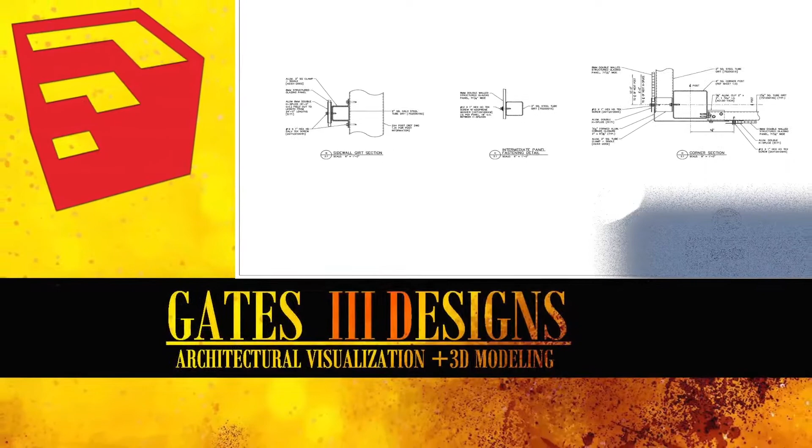Right after high school, I went straight into community college and studied architecture. In community college, almost immediately you're going to learn detail drawing, because at a community college they're preparing you to be a drafter. You have the option, obviously, to go on to a university - that's what I did after working, though. Which brings me to the point of having experience, hands-on experience specifically, is very important, even before learning detailed drawing.

What I mean is, if you can intern for a construction company or even volunteer at like Habitat for Humanity, that would be tremendous. Because first of all, you're using your hands and putting things together, and working off of blueprints. So you get to see how it's done, and you actually get to build it. If your school provides any kind of extended learning, design build programs where you stay off campus and live in a neighborhood, and maybe help do things for nonprofit organizations or remodeling homes or things like that.

Those are great, because I was actually part of a program like that when I went to a university. What we did was work for a nonprofit organization doing signage, and my team was responsible for designing signage outside of the building. It was fun drawing it, and you work with your professor or instructor - they guide you and help you, and you're actually building and ordering, being responsible for ordering the product, sizing the product, and drawing it correctly so it can be cut correctly. It helps out tremendously, so doing those types of things helps a lot.

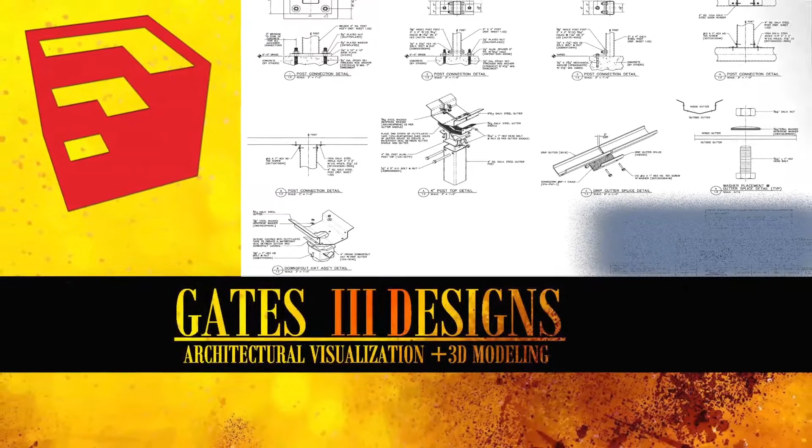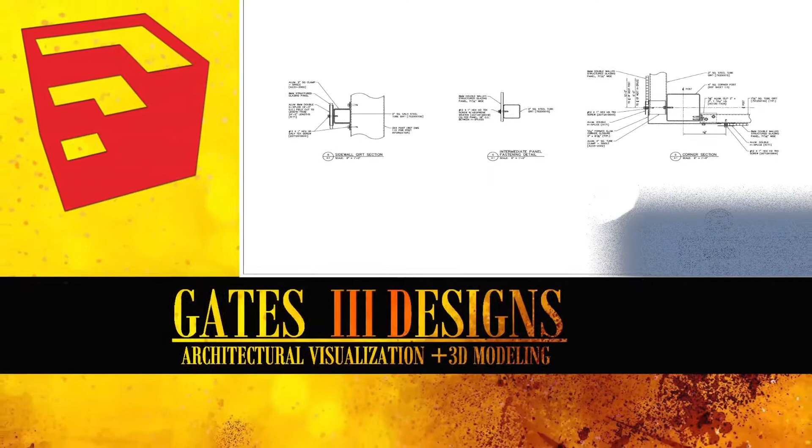I noticed when I went to a university that a lot of students didn't begin to learn detailed drawing until they got into their third year. Some schools second year, but a lot of schools third year, especially if it's a BA degree in architecture. It's going to be really artsy-based and maybe a little difficult to grasp how detailed drawing is done until you maybe intern somewhere or get some type of experience. But when it comes to interning and experience, I personally would suggest working for a construction company or an engineering company, something of that sort. Or if you have a design build program at your school, take advantage of that.

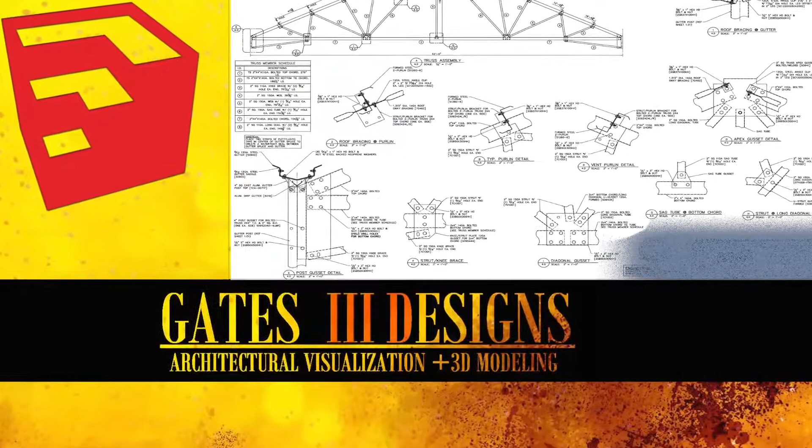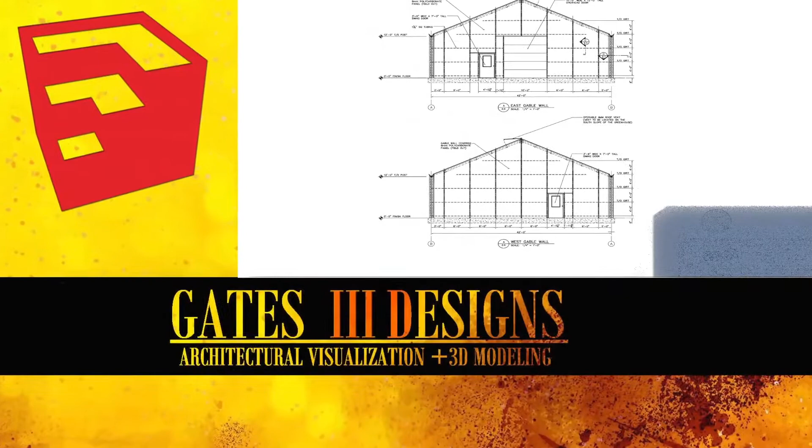While I was in school at community college, I actually interned for an engineering company, and there I learned - I saw how the concrete guys would read blueprints, and I heard complaints. I'd hear, 'Oh, I hate when architects do this. Why don't they do this? Why don't they do that?' Things like that are important. These are things you can take back to an office, or when you begin to work in an office and say, 'Hey, I used to work with concrete guys. A lot of them don't like that. They prefer this. What if we did this?' Just try it - just suggest it to your boss.

So yeah, experience is key. I say actual experience is a great way to learn architecture detail before you get to the drawing board. But like I said, at a community college, you're more than likely going to learn it immediately, and at a university it's going to take some time before you start taking those classes. But it really depends on the school - a lot of schools are different. But like I said, if it's a BA degree, it's not going to be a lot of that, and if so, it'll be later.